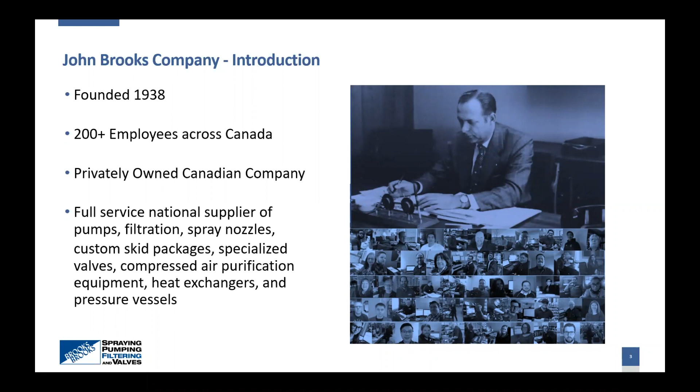A quick recap of the previous presentation consisted of compressed air, capacity versus pressure. It was mainly the energy costs associated with fabricating compressed air as a utility, the cost of once you compress the air, then if you have a leak, there's a cost associated to that. Compressed air filtration costs depend on the type of filtration that you do - is it just simple particle removal, liquid removal, dehydration? So the capital or the operating costs go up dependent on the level of filtration required.

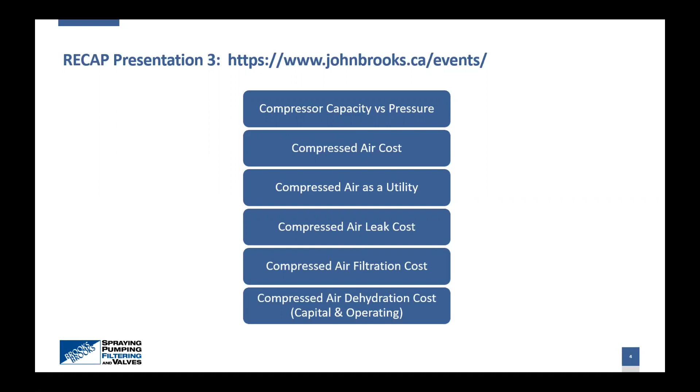Just to summarize, today's presentation consists of air intake filters, oil mist eliminators - I'm not going to be covering liquid filtration, that one slipped in there - compressed gas filtration, and at the end we'll have a few moments to answer any of your questions.

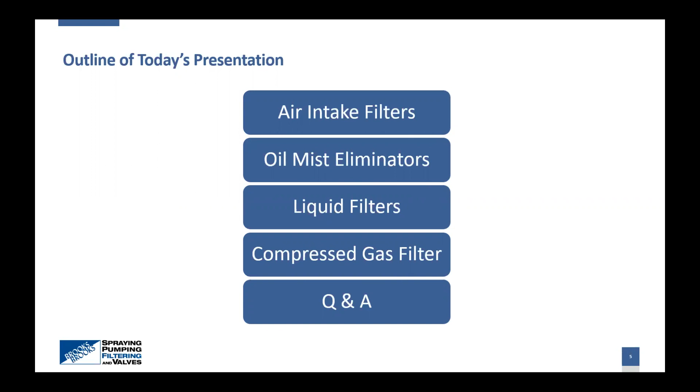Typically, when we talk about filtration, there's multiple methods of filtering air, gas, and typically it would consist of using a pleated filter media. We can use centrifugal forces, which I'll elaborate a bit more on, to remove larger particles. So it's always dependent on the level of filtration that the client needs. And the goal is always to not filter to a finer micron or specification than required, because the associated cost of pressure drop and the longevity of the filter would have a negative impact if you're filtering down to a smaller level than actually is required.

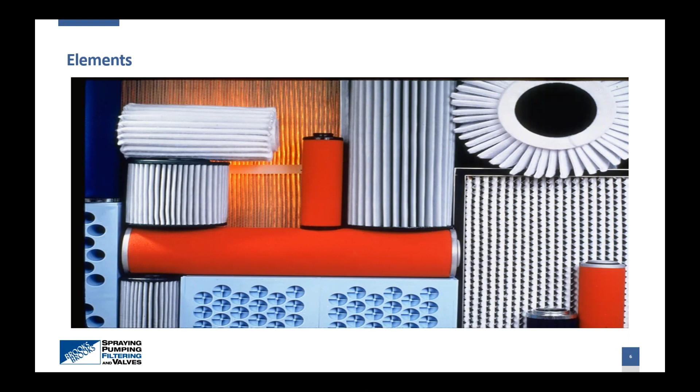And when we talk about filtration, there's multiple methods of evaluating the level of filtration you require. In most industries, the two terms used are absolute filtration, meaning approximately 100% particulate removal, and then there's nominal rating. Nominal rating can be from 98%, 95%. So whenever they claim it's a nominal rating, it would be almost recommended to find out what the percentage of that nominal rating is.

Hank, you were indicating at one time that it's almost impossible to get an absolute rated filter, but we try to get as close as possible to that rating to assure that it complies with the customer requirements.

So we have test filter media that we've run several times on a single pass, and that's what we base our nominal rating on - 2 micron, 98% of 2 micron, 98% of 10 micron, depending on what the customer needs. Okay, thank you, good point.

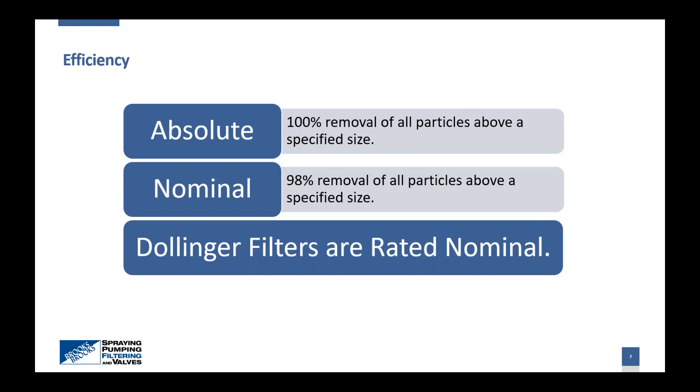Ideally, we like to have nice clean air entering these intake filters. In reality, these intake filters are commonly installed in corrosive plants, dust-laden facilities, or in the desert where there's sandstorms. Basically, they can be installed anywhere.

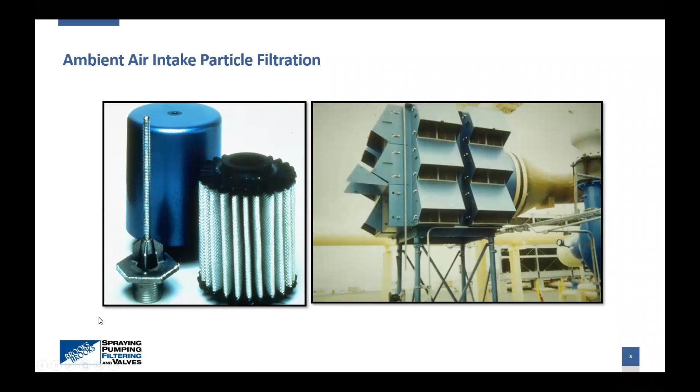Regretfully, not all of the installations we have to install equipment in are nice, clean installations. I call this one air intakes with an issue. Basically, some of the issues we can have in Canadian or North American climates is that frost buildup could build up at the air intake. If you have a certain velocity and moisture content in the ambient air, you'll block up the air intakes due to frost accumulation.

Some of the technologies we use to prevent that is we'd put electrical heaters just prior to the air intake to assure sufficient heat is supplied to prevent frost buildup. Another method is using hot oil or hot gas from the compressor to recirculate through tubes just prior to the air intake to partially heat up the air and prevent frost buildup. Happily, once the air gets cold enough, there is minimal moisture in the ambient air, so below something like minus 10 degrees Celsius, we shut the heaters off because there's almost no moisture content in the ambient air, so we don't need that anymore.

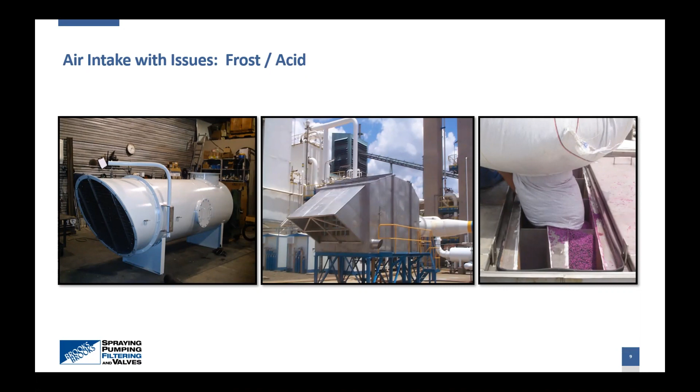Hank, anything you want to elaborate on these air intakes with issues, or we're good to go? No, I got nothing to add to it at this point.

It also at the same time removes moisture or liquid droplets, 99.4% of all moisture. Basically, the simple principle of operation is the air velocity is caused to create a spin action or centrifugal action, and it sends the larger particles to the outer perimeters of the filter element, where they get dropped out to atmosphere.

The interesting point that Hank clarified to me is that we may have 100% of the air coming in, but then there is a certain loss of air that is expelled to the atmosphere, and the majority would be going to the air intake, which is the clean air. This is to knock out the larger particles and prolong the life of the second stage filtration. Hank, can you elaborate on what is the approximate loss of air?

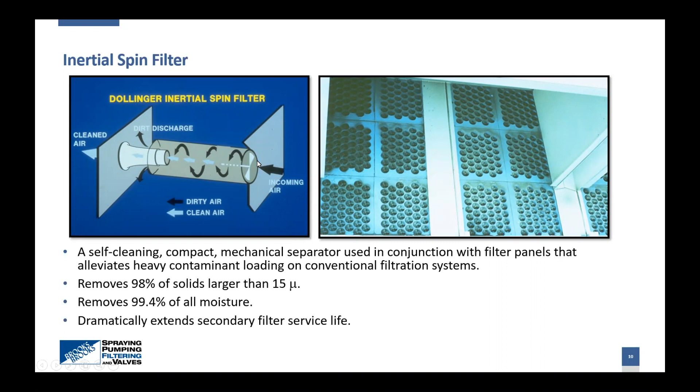Talking about those panels, that's the next slide. So here we see some of the panels that are downstream of the spin filters. This would be the second stage of filtration. The third slide would similarly be the second stage of filtration. One of these 24-inch by 24-inch panels can handle approximately 3,000 SCFM, which is more than many of our competitors, so we can create a smaller...

Senna, sorry, I need to correct you. The 24 by 24, we have the 517 and the 518 can do about 2500 CFM. The 519 can do about 2000. And then we have the new generation panel, the first stage and the second stage - they can do 3000 CFM, and the 0.3 micron panel can do 2500 CFM. Correct. Yeah, so it goes with the rule of thumb that the finer you filter it down, the higher pressure drop or reduced capacity of the filter element.

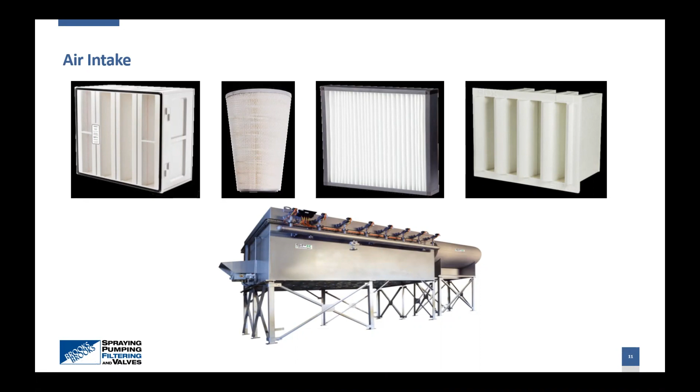Good point, Hank. Illustrated just below, we see a different design of air intake filtration - basically this is a pulse jet system. You see the various tubing which would supply compressed air to clean out the element, the slanted element here. The method of operation is that the airstream goes from the outside towards the inside. When there's a certain pressure drop, it automatically sends a pulse of air to backfeed this element, cleaning it out. I think we have a better illustration of that on the following slide.

Here you see a number of these elements. This is a pulse jet system, and they don't all pulse at the same time because we don't want an interrupted flow of air. So one of the two would be pulsing when required, and it would continue pulsing until the elements have lowered their pressure drop to an acceptable level that we can put them back in operation.

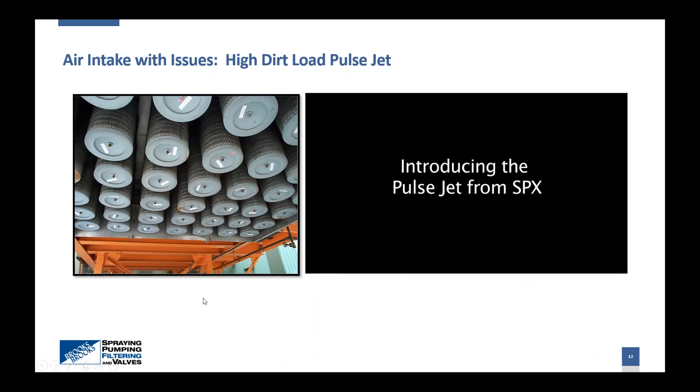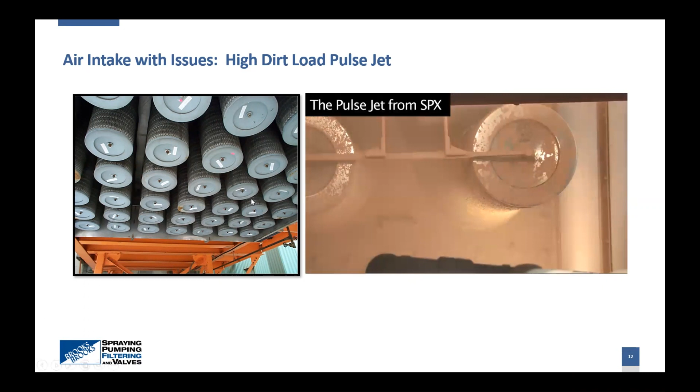It's sort of nice to see some of these units in operation, but what's the goal of why we want to clean the air prior to compressed air intakes, gas generators? It all falls down to wanting to keep the compressor performance at its optimal levels. We want to increase the compressor life, so we don't want particulate eroding the internals of a compressor. By filtering particles out at a preliminary stage, it reduces maintenance, repair, downtime, increasing the reliability of your equipment.

Then a key factor is you don't want to have process or product contamination. So depending on the application the air is used for, you want to get as much or all the contaminants out, being chemical contaminants, particulate contaminants. We even filter for shad flies in different seasons of the year, depending on the locations of installation. So the cleaner, the better you filter at the initial stage, the less troubles you have downstream.

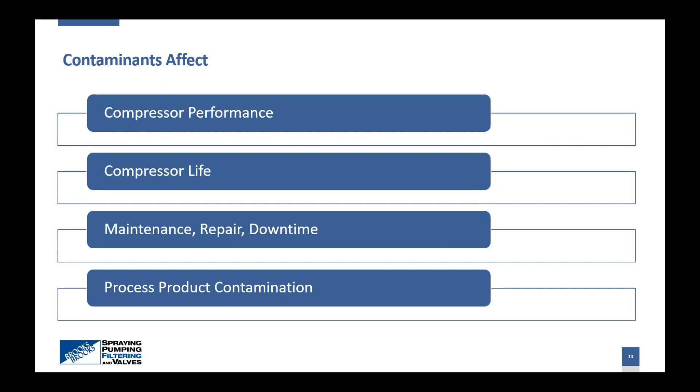There's a certain rule of thumb that initially, for a blower, we would indicate a 10 micron filtration level would be sufficient. Similarly for a reciprocating compressor or for a screw compressor. For centrifugal and turbine compressors or equipment, we would go down to a finer micron level, from 2 to 3 micron. But we always request from the customer what is the optimal level of filtration for their needs, because we don't want to over filter and create higher pressure drop or increase the capital cost. So it's made on a design basis, based on the requirements of the actual application.

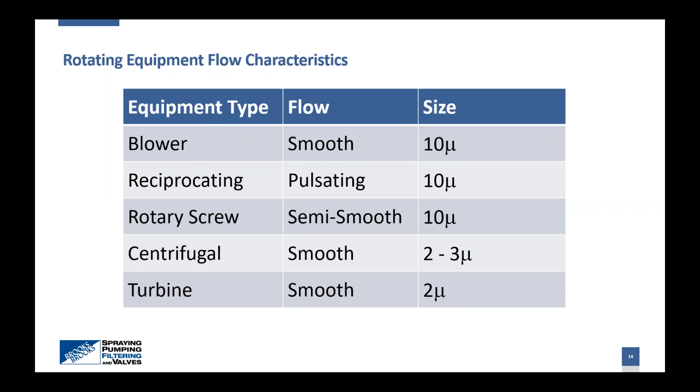Some basic installation guidelines, as I illustrated earlier: we want to have the air intakes approximately 10 feet or higher above ground level, installed at least 6 feet from walls, roofs, and any other sources of contaminants. We're trying to stay away as far as possible from any source of contaminants, as indicated in line item number 3. We don't want vapors coming out of a facility that get sucked in by the air intakes, or oil mist or other negative gases coming out of a facility. So we want to be as far as possible from any sources of contaminants. We also consider prevailing winds.

We don't want to take air from a room, because the amount of BTUs or heat required to reheat that room would not be cost effective. We want to minimize pipe lengths and bends. Pipe lengths create pressure drop, bends create pressure drop. So we always want to keep bends and pipe length to a minimum, having it as close to the point of use as possible. And we have to have accommodations so that personnel can change out the filters or otherwise maintain this equipment.

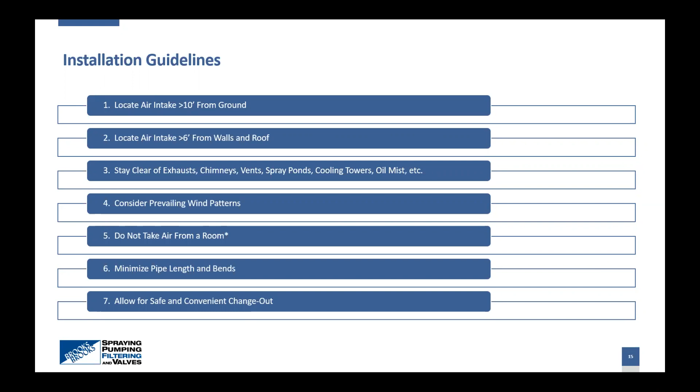Good point, I forgot about the silencers, and that is definitely a source of noise. Some of these air intakes, even though they're sucking the air in, it's still a substantial source of noise.

The next section we're going to get to is some of the contaminants that facilities create, and we want to ensure that oil vapors, consisting of oil vapors exiting from process plants, from gas generating plants, are eliminated. One of the reasons we want to eliminate these oil mists is so they don't get sucked in by the air intake filters we previously discussed.

Here we're illustrating some of the oil mist created from gear lubrication, and equipment that is spinning at high velocities, that has bearings and oil for cooling and lubrication purposes. There is a certain oil mist that is created, which commonly presently gets emitted to the atmosphere.

So John Brooks, being an environmental company, we always try to do what is best for the environment and minimize oil vapors going into the atmosphere. Here we're illustrating some of the vapors that come out of different crankcases and gear lubricators, just in a vapor form. Typically these vapors are approximately 0.3 micron in size, and we'll elaborate a bit more on that aspect.

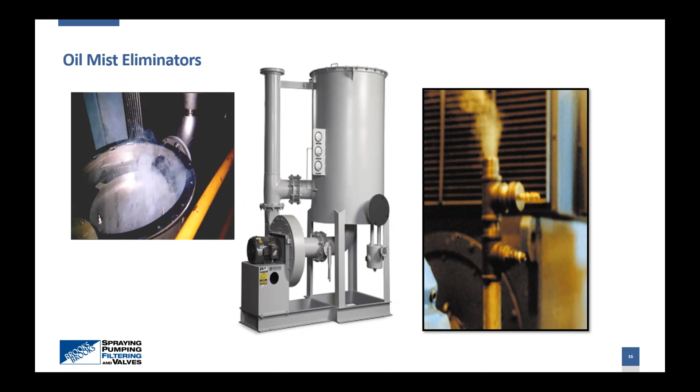So why do we want to control oil mist emissions? I'll start with the environmental one. That's the easy one. Basically, from an environmental standpoint, we want to keep our air clean and keep this planet going, sort of thing.

From an economic standpoint, if you were flowing approximately 200 CFM of oil mist consisting of 100 ppm of oil, that would equate to approximately 100 gallons over a span of a year. So just the economics of wasting that 100 gallons when it could be recuperated and sent back into the crankcase or the location where this oil mist is originally coming from. Typically the oil even comes back cleaner than it's emitted because it goes through a filter and then is subject back to the crankcase.

And always from a safety standpoint, if you have oil mists exiting a facility, that would be a safety hazard because it could go on walkways, ladders, different locations where it can cause a slippery condition. So there's the safety aspect of it.

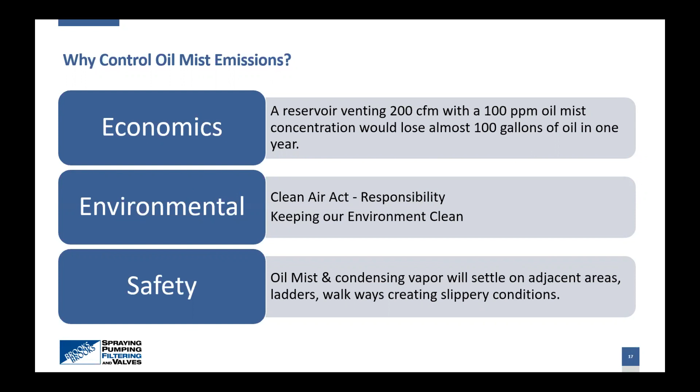Basically, there's 3 different designs for oil mist eliminators. The simple one is when there's a positive pressure from the source and it overcomes the differential pressure of the element. The differential pressure is quite low on these, only 18 inches water column. So if there's a positive pressure in the crankcase, it'll just flow that oil mist through the coalescing element and basically goes out to atmosphere.

And then, not illustrated here, but there would be a drip line at the base of this housing, which would feed the condensed or coalesced oil back into your crankcase so you can recuperate that oil. Or if it's contaminated with other liquids, like water contamination, it can be sent to a disposal drum, which could be disposed of at a later time. So that's with positive pressure.

Certain crankcases don't have a positive pressure. So we have our oil mist flow coming in from the right, and then we subject it to compressed air, or we install basically a venturi, which creates a vacuum, and the compressed air flowing through the venturi sucks in the oil vapors, assisting in the elimination of them. This is for small flows up to approximately 60 SCFM, and very cost effective. You just need a little compressed air line to feed some air and it does the trick excellently.

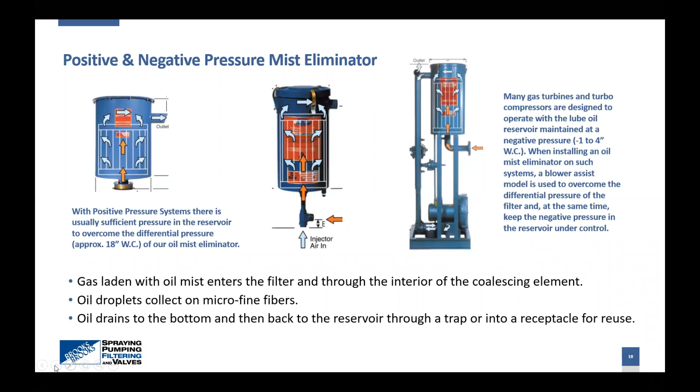What's the cause of oil mist? As previously stated, oil mist is from crankcases. It's from oil that is in contact with bearings that reach temperatures between 350 and 700 degrees Fahrenheit on rotating equipment. These machines typically use large volumes of oil for cooling purposes, for lubrication purposes, and as a consequence of these high temperatures, the rotating equipment, the shear factor causes oil vapors to be created.

And as previously stated, the oil vapors are a very fine oil mist. So it is a condensed mist, not in a vapor form, but more like an aerosol form.

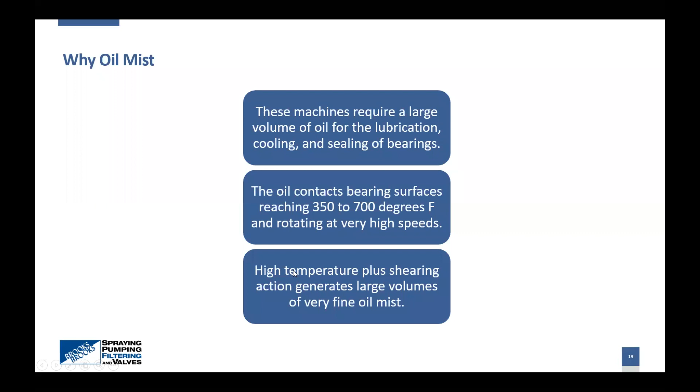So how do we eliminate this oil mist from the exhaust of these pipes or from the source? The most simple method to do it is to coalesce it. So we start off with very fine liquid droplets, and coalescing is basically taking small droplets and putting them together with other small droplets to make larger droplets. Once they get large enough that, due to gravity, they have sufficient mass, they can be eliminated by the outer perimeter of the filter element. That's pretty much the summary of a coalescer.

Okay, hey Hank, what do you think? Does that summarize the coalescing principle? Yep. Okay, perfect. Can't add anything else.

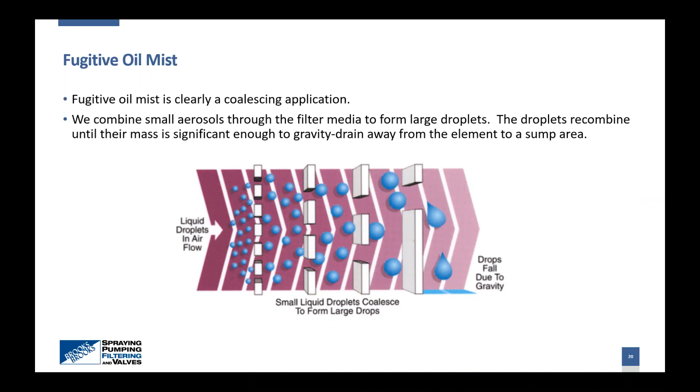And these coalescing filters could be used for oils, water, basically removing any liquids or mists out of an air line, or a compressed natural gas line. It could be CO2 lines that have a certain water mist in them, and it's just to minimize the water quantity or liquid quantity in a gas compressed air line.

Well, in a sense I skipped over a point there because I transitioned from the oil mist eliminator to the coalescing filters. But it's the same process, except coalescing filters are used more for gas lines compared to oil mist eliminators which are used on crankcases. Same concept: in a compressed gas line, we would still be coalescing the little aerosols into larger liquid droplets.

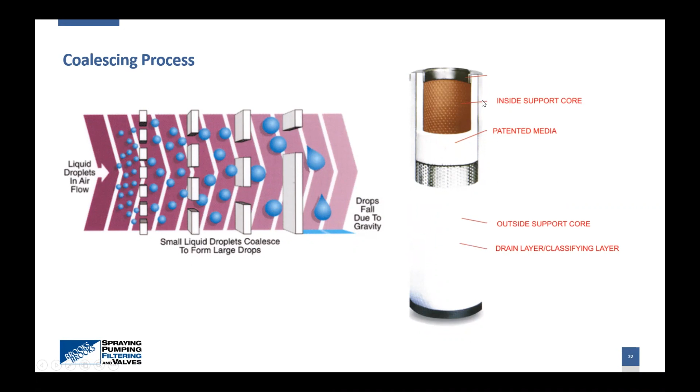What we find interesting when we service some of these filter elements is that at the lower quadrant of this element, the element seems to be dirty. And that is part of the design—we want the droplets to be dropping off at the lower quadrant of the filter element. If they were coming off at the top, the gas velocity is higher, so you can have reentrainment of those droplets as it's going through the filter housing.

I'll just go back here—basically we see them get stained at the lower quadrant of the filter elements, and our goal is always that the droplets come out at the bottom. If they were coming out at the top, there's more velocity, so there's more chance those droplets would get reentrained and go out.

So when our customers tell me, hey, your element only looks half used because it's only half stained, that's part of the design, and we want the droplets to be coming out at the lower quadrant of the filter element.

Here we have an illustration of a fuel gas conditioning skid, and it uses in this design multiple methods of filtration—gravity separation and coalescing. I'll just let the illustration show a bit of the design. This would be a two parallel system, two filtration skids in parallel.

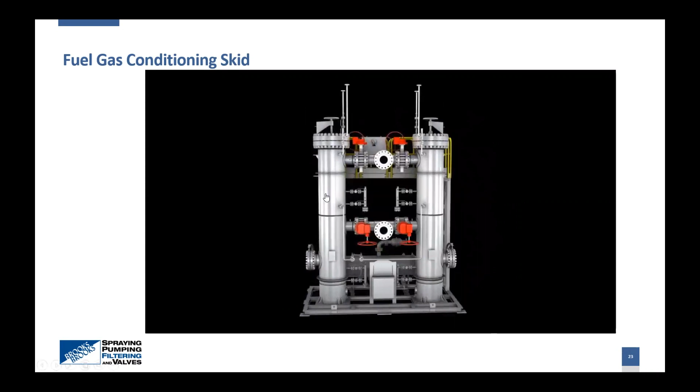And the first stage of filtration is solely using gravity and perhaps a mesh pad. So we have the compressed gas coming in, going through the first stage, which would remove the bulk liquids. By removing the bulk liquids, we're pre-filtering the gas and minimizing the contamination load on the second stage.

The second stage is more of a coalescing filter, so it is more efficient, removes more of the finer oil mists, but it is a consumable item at the second stage. So the finer we can filter at the first stage, the lower the operating cost is for the second stage, and the lower the pressure drop is, because you're not trying to remove all the contaminants through one filtration equipment.

The next section I'm going to talk about is particulate filters. Design-wise, similar to the coalescing filters, except we're not removing any mists, liquids, or droplets. It's not a liquid filtration method, not a method of removing liquids from a gas. These are solely designed for particulate removal. So if you already have a clean, dry gas, particulate filters are the way to go.

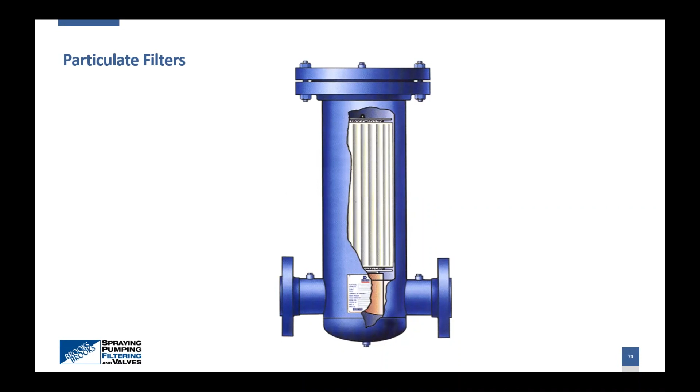One of the reasons I mention that is because you typically have a larger filtration area with a particulate filter for the same size of housing. The logic behind that is on particulate filters we would be filtering from the outside in to take advantage of that larger surface area. For coalescing filters, we have no choice but to go from inside out because of the accumulated liquid that we have to drain.

This slide illustrates basically our particulate filter with pleated media. The media could consist of multiple materials to accommodate corrosive gases or different micron levels. I think there's approximately—I don't know, would you say 200?—different materials and configurations that we have for filtration.

We have a large number of different sizes. We have about 20 to 25 filter medias that we use on a regular basis, and then we also do stainless steel, Hastelloy, for very corrosive environments, and where very clean filters are required.

So if the filter cannot allow the little parts from the filter media, like glass fiber, to be in the process, then we can go to a stainless steel media. You'll see it when looking for the term oxygen clean service. We nowadays go even to a stainless steel element.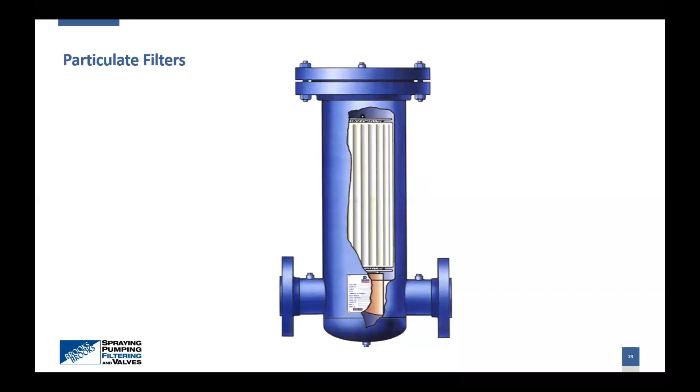It's also sized based on the application. So if we know it's for natural gas and they have nozzles downstream, perhaps we would recommend that the filtration level is approximately 1/3 of the nozzle size, or 1/4, based on the requirement for the gas or compressed air.

Then there's certain criteria we take into consideration when we make the filter elements and the filter housings. If I can put in a little plug, John Brooks, we own a company called MDA, so we fabricate our own pressure vessels. We have an ASME approved facility, so we can make custom designed filter housings, and we work hand in hand with Henk, one of the design engineers, to create or fabricate custom-made filter housing.

This way we minimize the customer's requirements for pipe changes. If they have an existing filter housing they want to change, we can accommodate that and make it to the customer's needs. But just to go back to the filter elements, some of these filters operate at pressures from 100 psi to 1,000 psi.

So we have to accommodate differential pressures or collapse pressures of these elements to assure that if they have a 1,000 or 800 psi line and somebody's opening up a valve instantaneously, there's almost a hammer effect. So we want to assure that the filter element is constructed strong enough to accommodate large differential pressures.

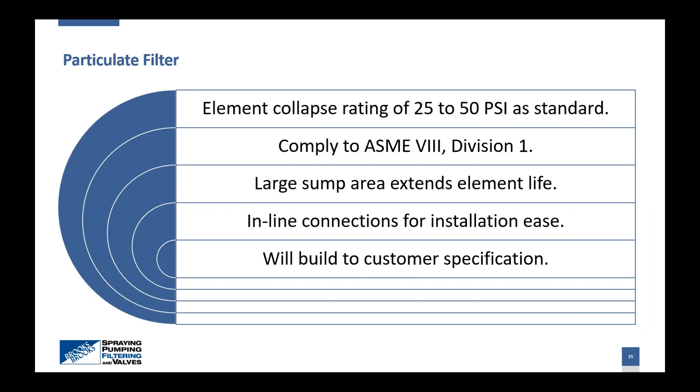Is that it? Yeah. No, go ahead, I'll finish. I'll say what I wanted to say at this point. Okay, I'll keep going then.

As I stated earlier, the filter elements have an inner support screen. For particulate filters, the flow of the gas or air is from outside in. Typically the collapse pressure is 25 to 50 psi, and we go up to 100 psi in certain circumstances. They would weld inner support cores inside to make it structurally stronger.

Then we have to place a wire mesh or some sort of support to put the media on. We want to have as much media as possible, so the life of the filter element is as long as possible, and the pressure drop stays low as long as possible. So we create a sort of fin-type extrusion that the media would be applied to.

In certain circumstances, if customers are filtering materials of certain value, we strip the media off and send it back. We had a facility that used these filters for platinum extraction, and they would take the media off, basically burn it, and recuperate the platinum because of the value of the metal.

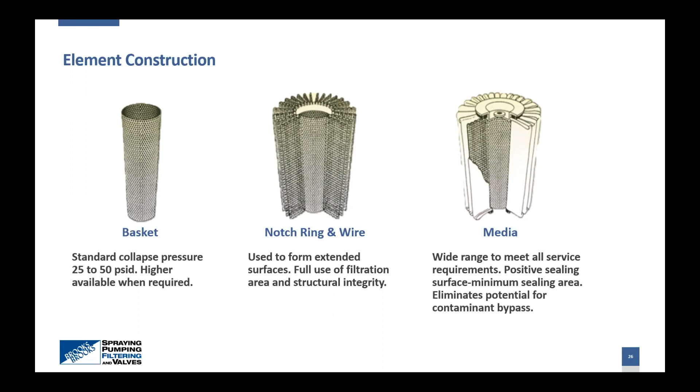Then, when we design these filters, there's multiple factors that have to be taken into consideration. Some of the basic ones are the inlet pressure, the pressure drop, the flow rate. In previous webinars, I always explained that the worst operating conditions for gas filtration are the lowest pressure and the highest velocity.

So now the capacity of that filter housing would increase. One of the reasons I'm elaborating on this topic is because these filter housings can operate at 800 psi, and at 800 psi we have to ensure the differential pressure is low enough so we're not approaching anywhere close to the collapse pressure. We want to minimize pressure drop to assure energy efficiency.